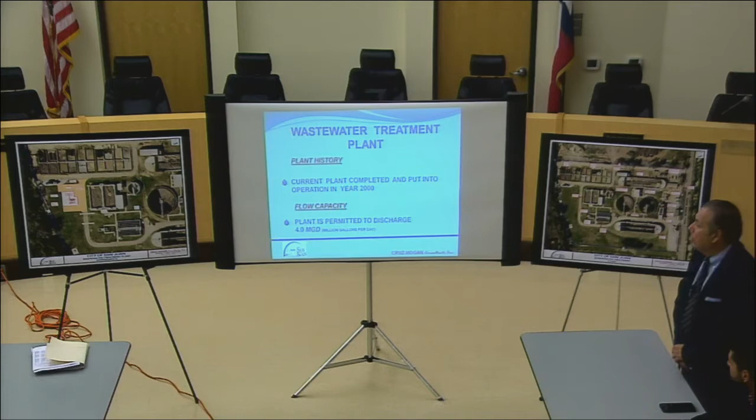The current plant was completed and put into operation in the year 2000. The plant is permitted to discharge 4 million gallons per day. Current discharge flow is averaging about 2.5 MGD per day, or approximately 60% of its permitted flow.

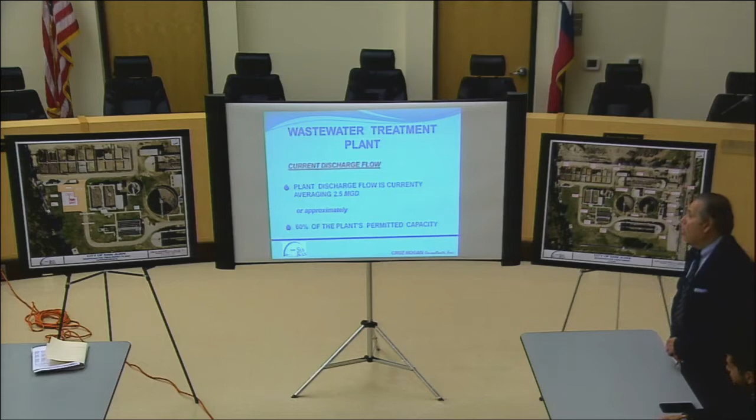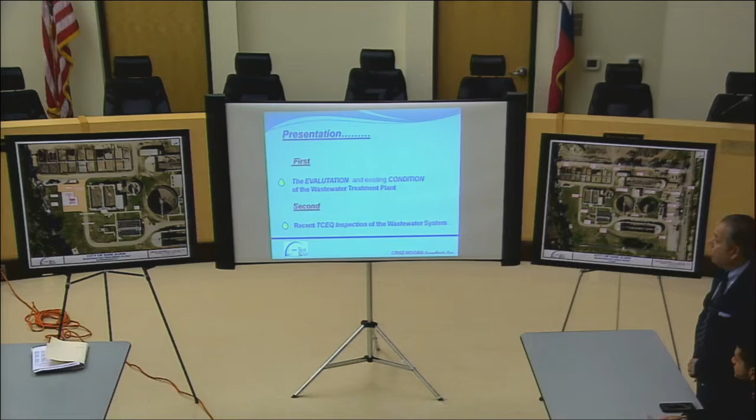Our presentation is going to be in two segments. The first part will look at the evaluation and existing condition of our wastewater treatment plant. The second portion will look at the recent TCEQ inspection of the wastewater system.

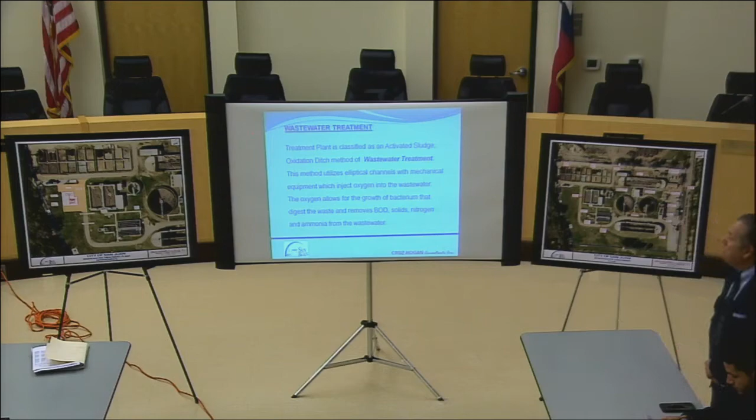This is Wastewater Treatment 101. In a very brief way, I'm going to tell you what a wastewater treatment plant does. The treatment plant is classified as an activated sludge oxidation ditch method of wastewater treatment. This method utilizes elliptical channels with mechanical equipment which inject oxygen into the wastewater. The oxygen allows the growth of bacteria that digest the waste and remove BOD, solids, nitrogen, and ammonia from the wastewater.

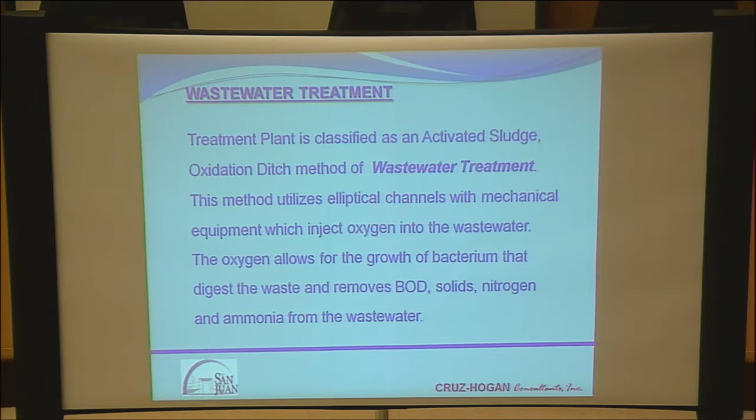Wastewater is sent to the clarifiers. In the clarifier, sludge settles and clarified water flows over the weirs, then into the chlorination and de-chlorination chambers for disinfection. The fully treated wastewater discharges into the adjacent drainage ditch.

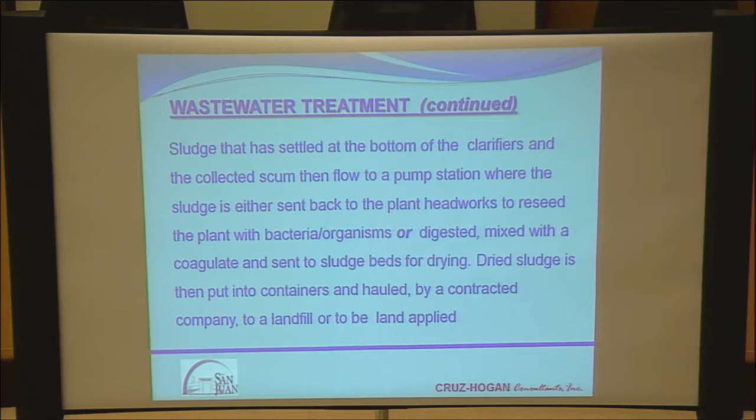Sludge that has settled at the bottom of the clarifiers, along with collected scum, flows to a pump station where the sludge is either sent back to the plant headworks to reseed the plant with bacteria and organisms, or digested, mixed with a coagulant, and sent to the sludge beds for drying. Dry sludge is then put into containers and hauled away by a contractor company to a landfill or to be land applied.

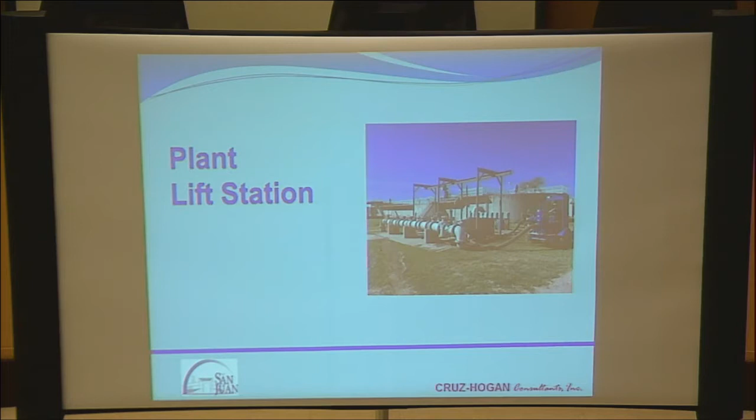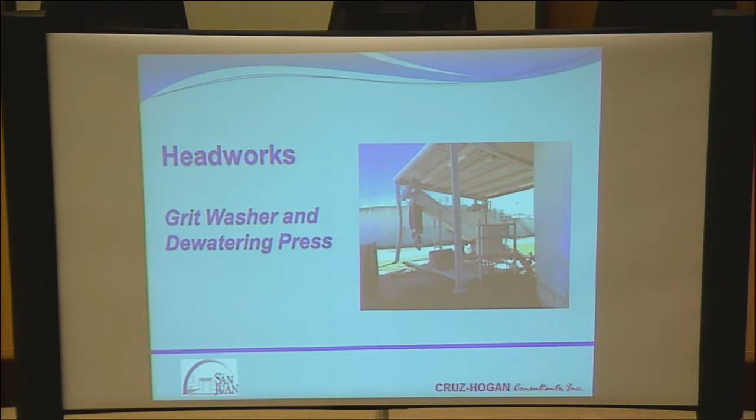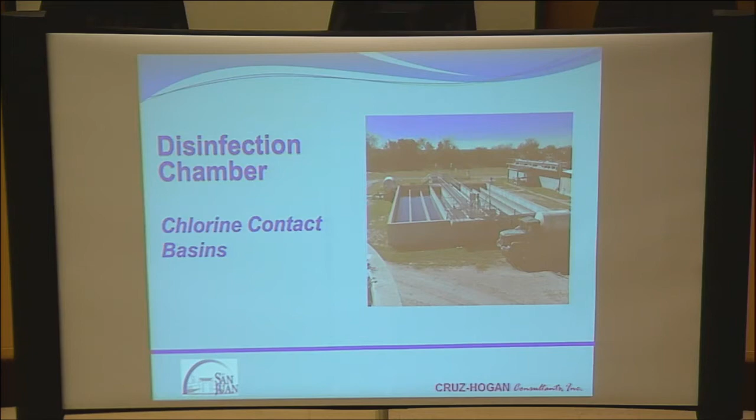This is the disinfection chamber, which has the chlorine contact for the disinfectant water. The chemical building houses the chlorination and de-chlorination systems.

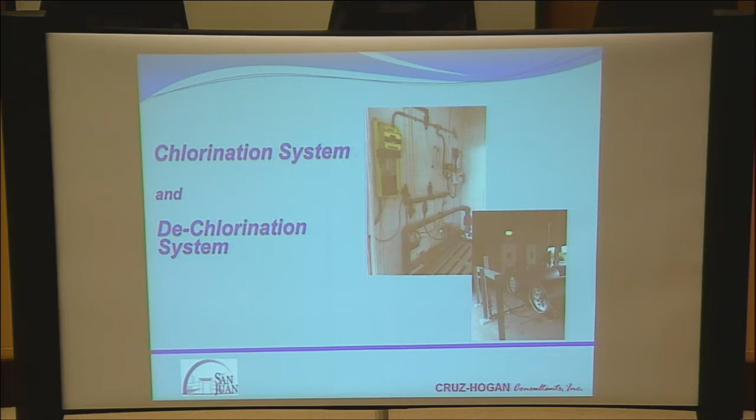In the chlorination and de-chlorination systems, you see some of our chemical injections. These are our chlorine tanks down here. This is the discharge metering of our wastewater, which goes through what we call the Parshall flume, the meter device.

Sir, I got a quick question. In reference to the chlorine tanks, is it safe, because I remember seeing them on the floor? Is that safe? It's pretty typical.

Normally they're on the floor, on scales, and that's where they feed the chlorine injection. It's fairly typical on this type of plant. It's just on the floor.

Some of the newer construction is starting to put them on top of concrete pillars, and the reason is it makes it harder for somebody to drive a vehicle into the tank. They're above the front end of a bumper vehicle, so it's a big concrete structure.

But one of the things a lot of smaller plants are going to is to get away from chlorine gas completely and go to ultraviolet disinfection. It makes it a whole lot safer, not only for the operators and the environment, but for the public in case there was an accident that released gases. The chlorine is very caustic, and a chlorine leak can actually hurt a lot of people.

Next slide. This shows how our wastewater comes into the plant and how it's discharged. You see the difference of what the treatment does for our wastewater.

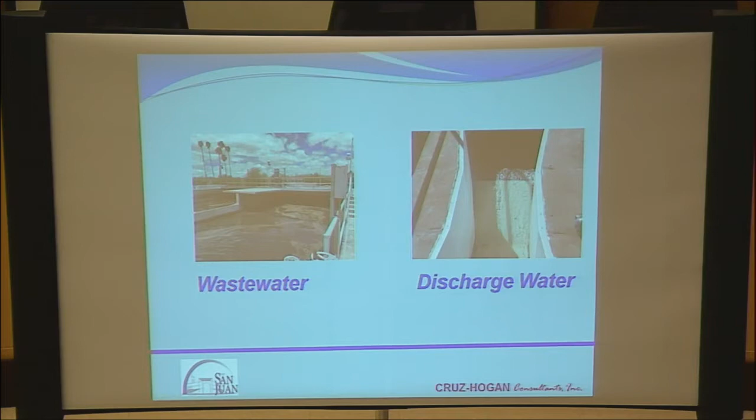As part of the wastewater process, we have what we call the biosolids train, where we take in the sludge, through the return and waste activated sludge pump station.

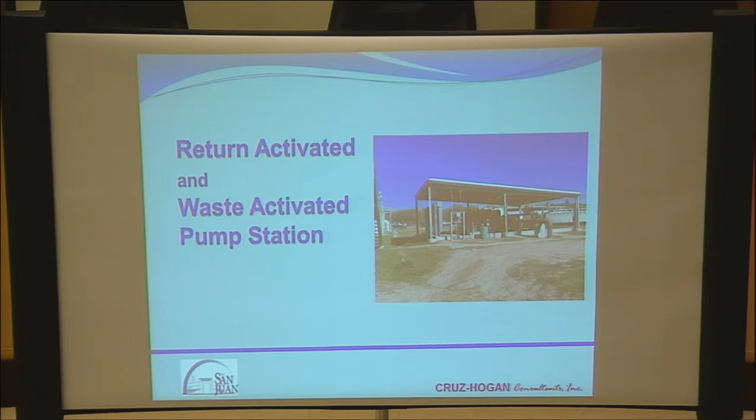This is the sludge gravity thickener. We estimate that the sludge comes into the thickener at 0.8% solids concentration and leaves at about 3%.

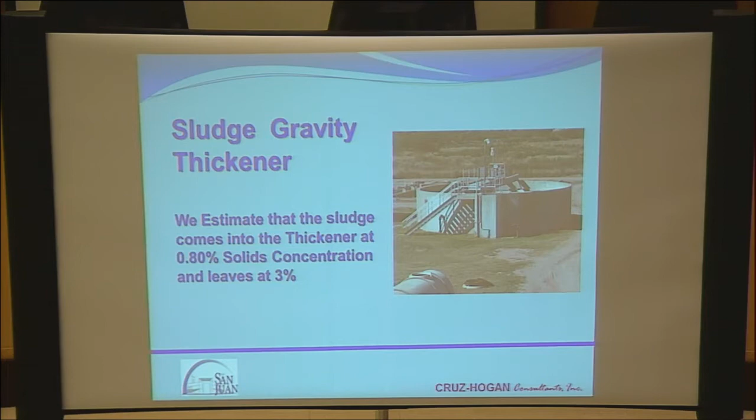The sludge digester reduces the biomass volume of the sludge approximately 40 to 50%. It reduces the amount of sludge that will ultimately need to be hauled away.

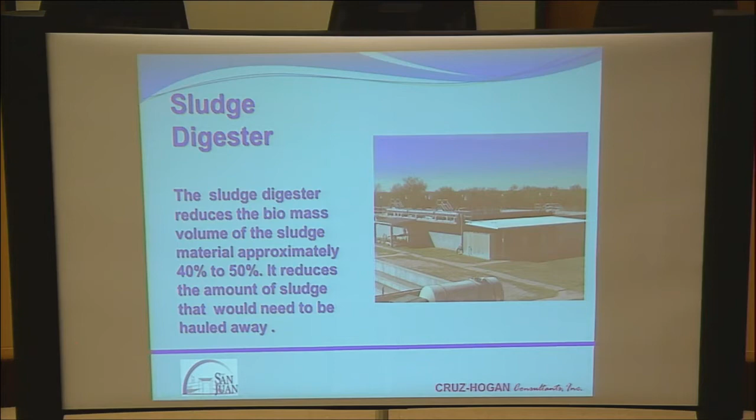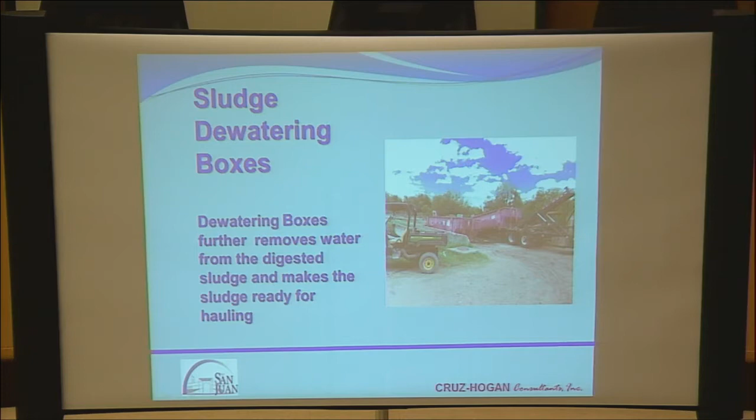Over the past few months, a preliminary evaluation of the city's wastewater plant was performed to assist the city in assessing the current conditions and needs of the wastewater treatment plant, and to assist in planning any necessary plant improvements. In the preliminary evaluation, we analyzed the conditions of all the existing facilities and equipment.

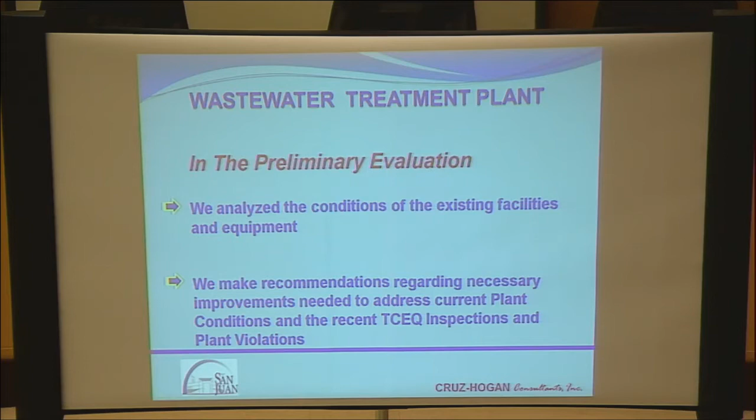We make recommendations regarding necessary improvements needed to address current plant conditions and the recent TCEQ inspections and plant violations.

The summary of the plant evaluation shows that many original plant components have been abandoned and are at a point where they need to be replaced. Many plant components have not been properly maintained over the years and need to be rehabilitated, repaired, or replaced. And some components have simply outlived their normal useful life and need replacement at this time.

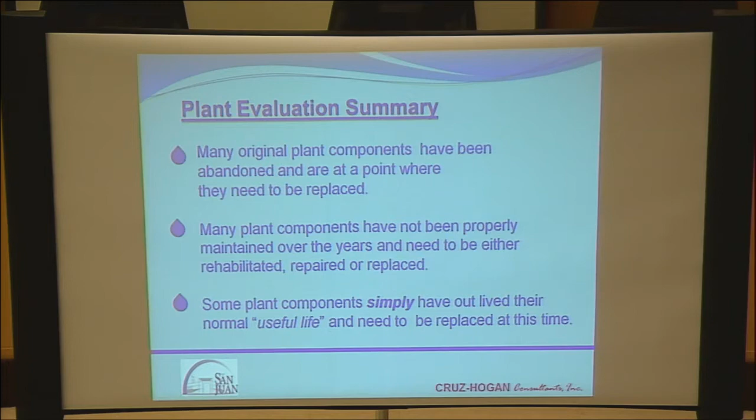Various plant components and equipment consume electrical power. Newer and more energy-efficient equipment should be considered.

Plant controls for efficient operations are limited or currently non-existent, so we recommend the installation of a SCADA system. It should be something considered in the upgrades of the plant.

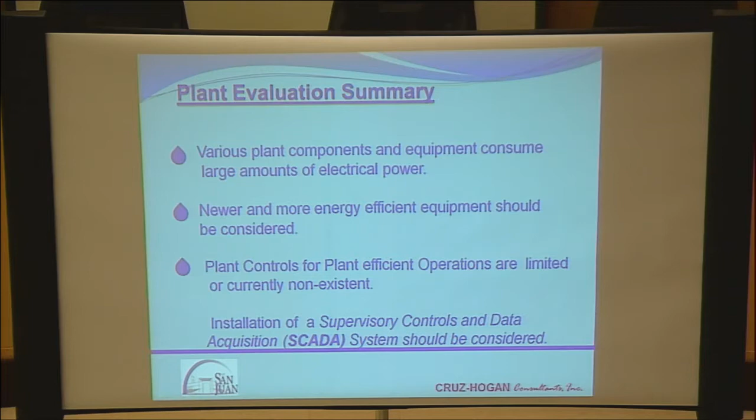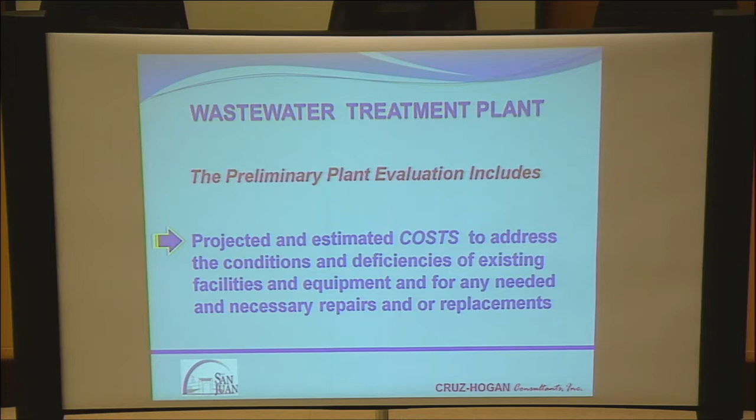The preliminary plant evaluation includes projected and estimated costs to address the conditions and deficiencies of existing facilities and equipment for any needed and necessary repairs and or replacements.

From the plant evaluation, a list of major deficiencies was developed. The first one is the plant lift station concrete well deterioration.

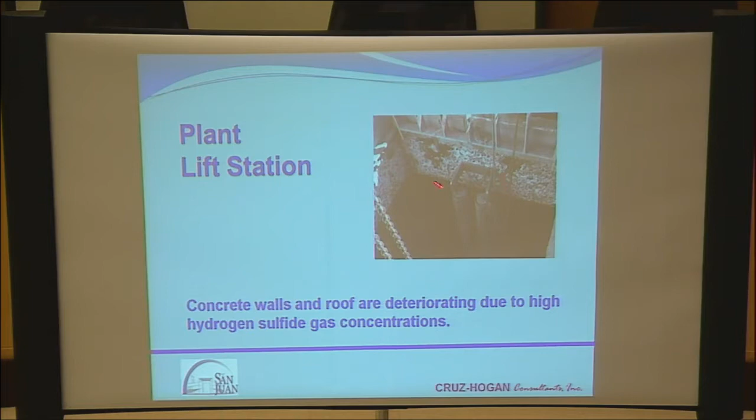If you remember, we saw the lift station—a lot of the concrete in the plant lift station has actually deteriorated. The H2S gas has corroded a lot of the concrete, since H2S gas creates sulfuric acid, so a lot of the concrete wall is being deteriorated. In a lot of places, the reinforcing steel is already exposed.

The second deficiency is the headworks mechanical screen, which was not operational. You remember, this was the thing up in the air that hasn't operated in years.

Right now, all the wastewater is being taken in through the bypass channel, and the screen is being cleaned manually. This poor gentleman actually, on a daily basis, goes out and physically has to clean the screen with a rake.

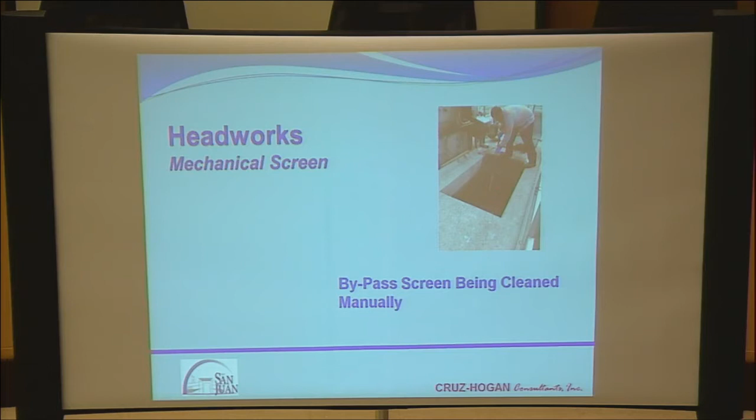The third deficiency that we noted is the headworks of the grit chamber not operational. If you remember, the headworks has a lot of growth, a lot of solids inside the chamber.

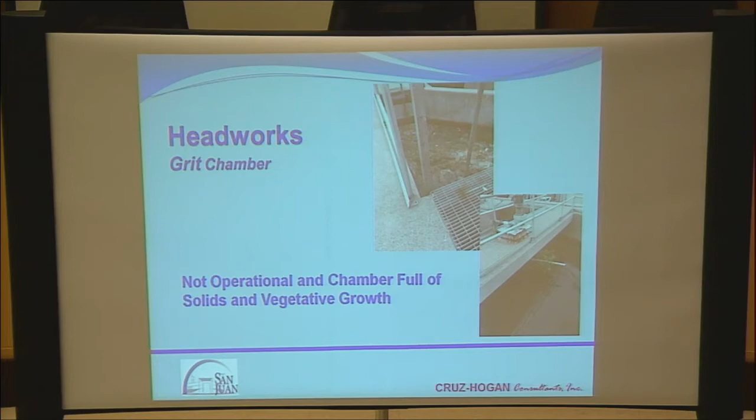The headworks of the grit washer, the dewatering screw press, is not operational. This is the one at ground level next to the headworks section. That hasn't been operational in years.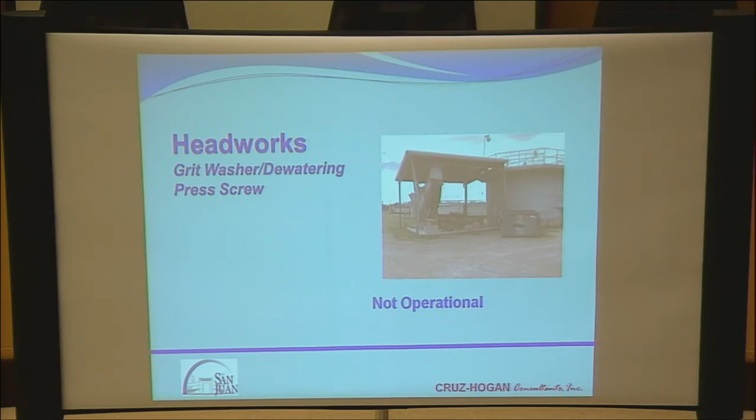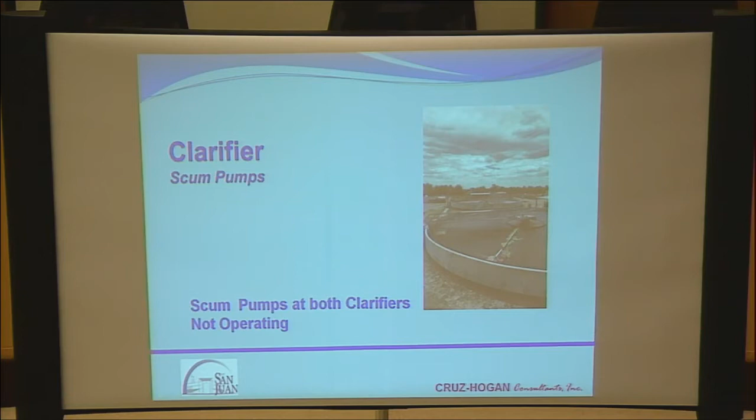The clarifier scum pump's not operational. Each clarifier has got a scum pump where all the scum on top actually gets pumped away. Those pumps are not operating at this time.

The gravity sludge thickener not operational. You remember this one was the one that had a little bit of vegetation inside, and hasn't operated in years.

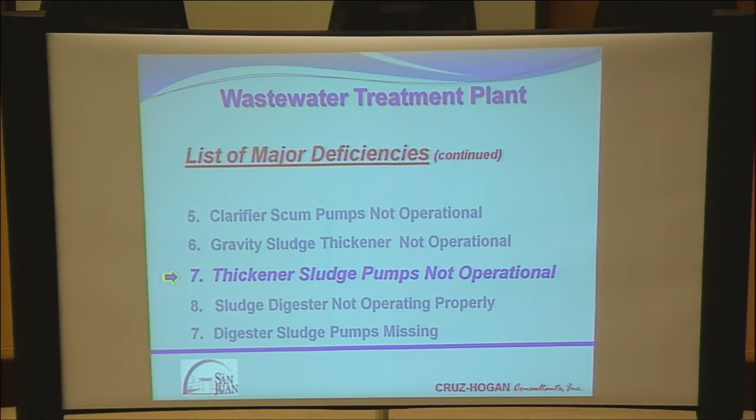The thickener pumps, the thickener sludge pump, is not operational. These are the pumps that actually pump the thickened sludge. They're not operational and highly deteriorated.

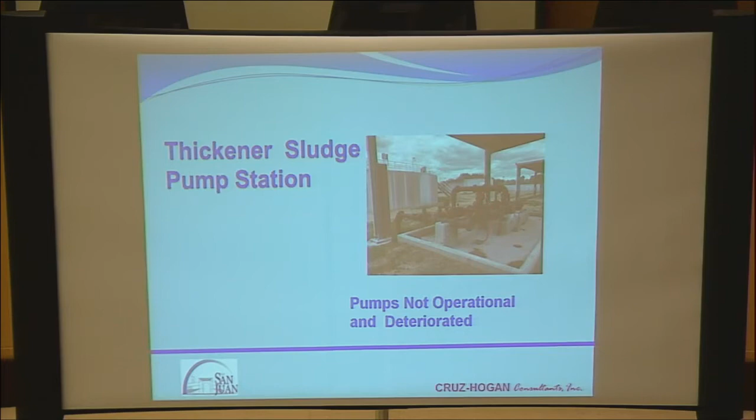The sludge digester is not operating properly. Remember, this was a sludge digester. The reason they're not operating properly, if we go to the next slide, is that digester sludge pumps are missing. These are the pumps next to the digester. They've been missing for some time, and I don't know where they are, but the whole station is highly corroded and deteriorated.

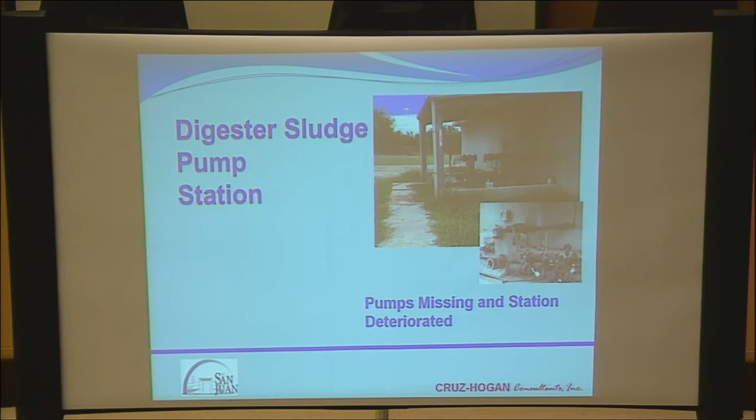The plant water pump station system is leaking. A lot of these pumps are worn, and actually they're leaking a lot of water. The pressure tank up here on top has got problems. The compressor, even though it's working, is kind of worn and deteriorated.

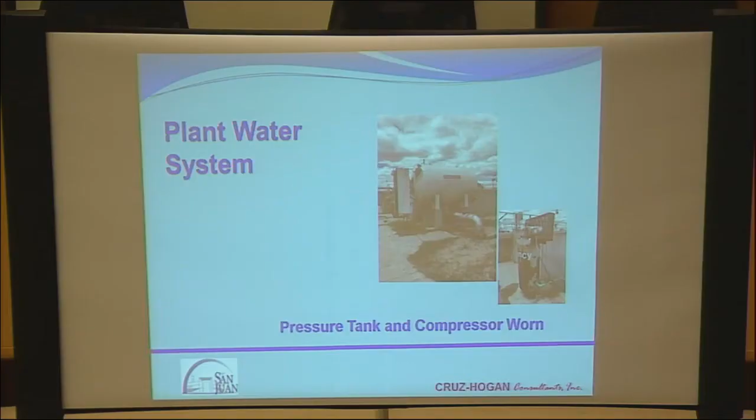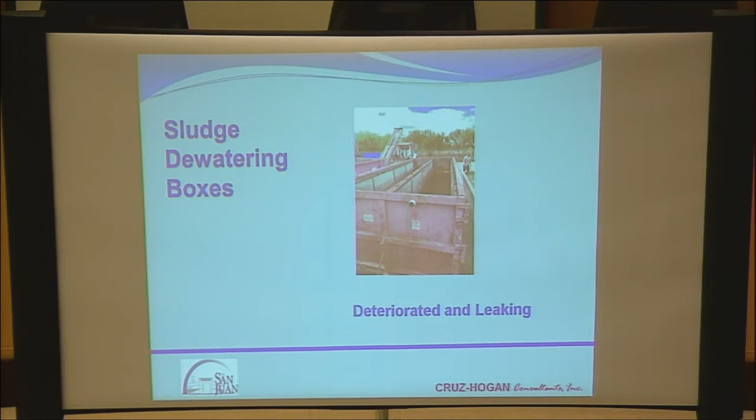The dewatering boxes are deteriorated and leaking. These are big red boxes out there that look like dumpsters. Actually, these are being replaced as we speak by the city public utilities, but they are highly deteriorated.

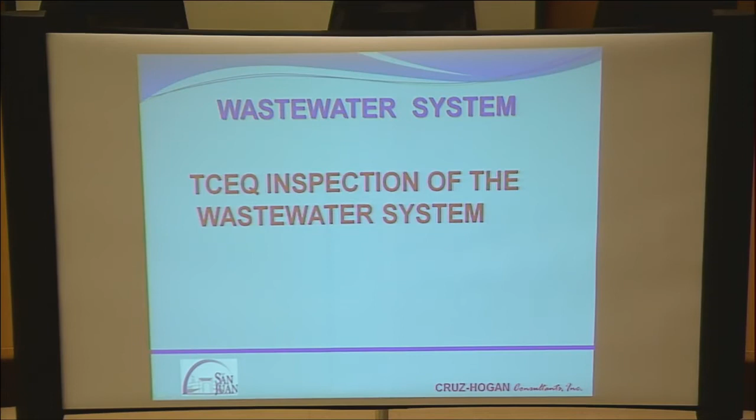Now we're going to talk about the TCEQ inspection of the wastewater system. On November 14, 2017, TCEQ conducted an inspection and evaluation of the city's wastewater system and treatment plant facility for compliance to TCEQ requirements. On November 30th, TCEQ issued a letter titled Notice of Violation for the Comprehensive Compliance Investigation for the city wastewater system.

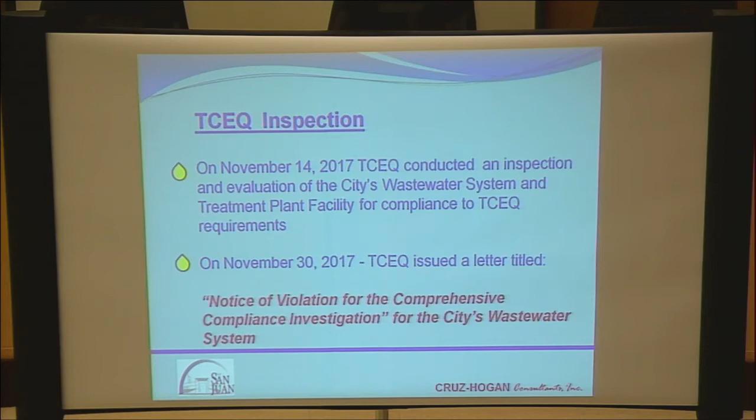On November 30th, TCEQ listed 11 alleged violations. 7 of the violations were for compliance issues at the wastewater treatment plant, and 4 of the violations were for compliance issues at 3 separate lift stations.

The violations of the wastewater treatment plant: the first one was failure to maintain the mechanical bar screen, and we've seen that bar screen is not operational. The second one was failure to operate and maintain the grit chamber. We've seen the grit chamber, of course, that was not operational also.

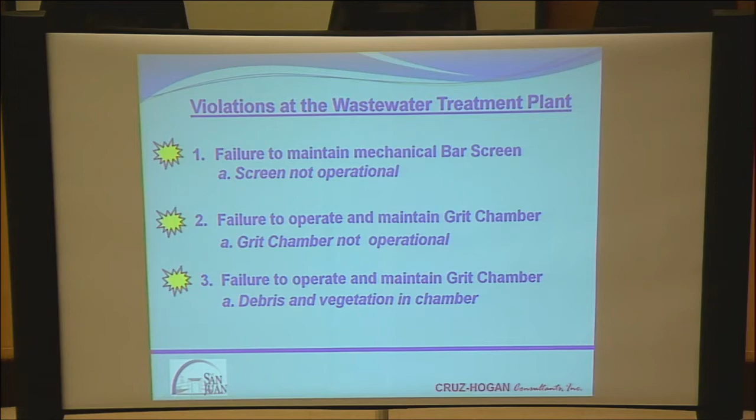Failure to operate and maintain the grit chamber - in this case, there was a lot of debris and vegetation in it, and of course we saw that too. Failure to operate and maintain clarifiers - there's excess solids inside the clarifiers.

Failure to operate and maintain the gravity thickener - if you remember, that thing was not operational. Failure to provide required plant protection - actually, there were some missing sections of plant perimeter fencing. That has already been done by your public works, your public utilities.

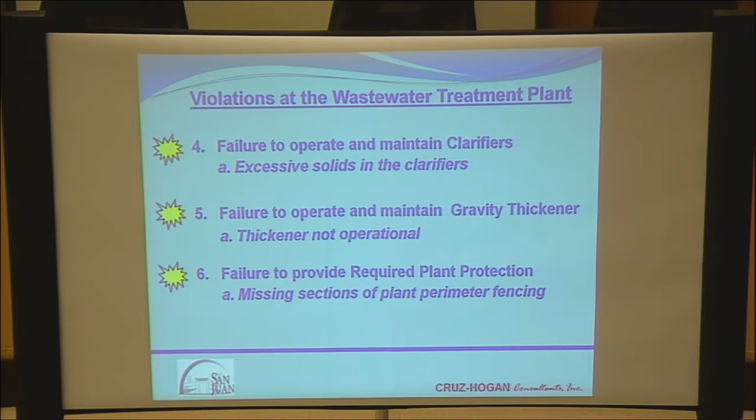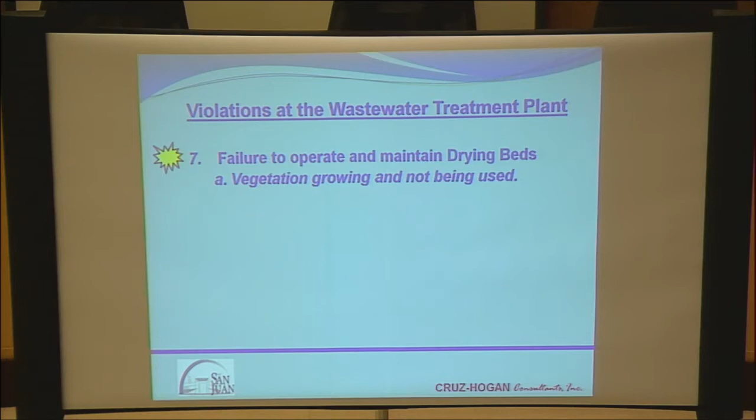Failure to operate and maintain drying beds. Those drying beds have basically been abandoned. They've got vegetation growing and are basically not being used. Now, the violations of the wastewater collection system.

A lot of these, David, are already addressed, but we're going to go through them anyway. Failure to operate and maintain lift station number 2 - excessive grease in the wet well. Failure to secure lift station number 2 - the west side of the lift station fencing was not fully secure.

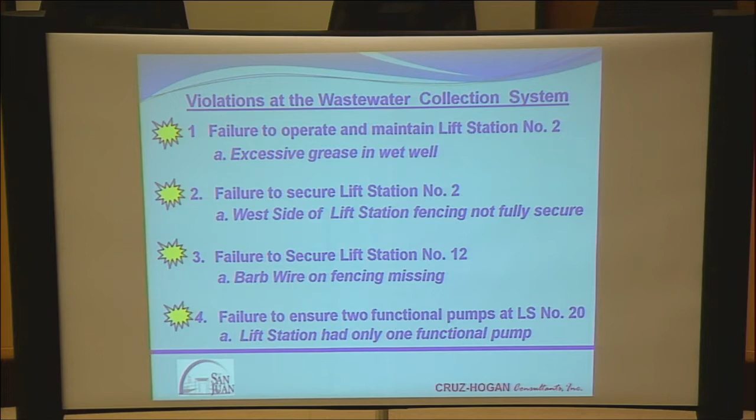Failure to secure lift station number 12 - barbed wire missing on the fence. Failure to ensure 2 functional pumps at lift station number 20 - lift station 20 only had 1 functional pump at the time.

The November 30th TCEQ letter requires the city first to prepare and submit to TCEQ a written description of corrective actions taken for compliance by December 29, 2017. But of course, the city received that letter mid-December, and the city has actually asked for an extension to reply to that. Also, we need to prepare and submit to TCEQ a correction plan to be taken by the city to resolve the non-compliance issues.

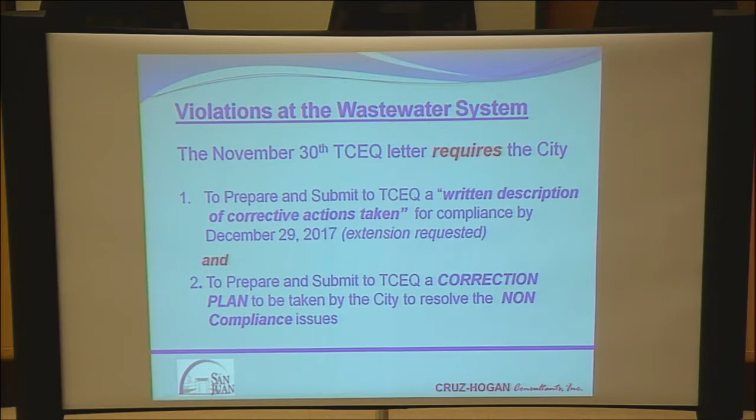And actually, we are currently preparing that now - the projected and estimated cost for necessary improvements.

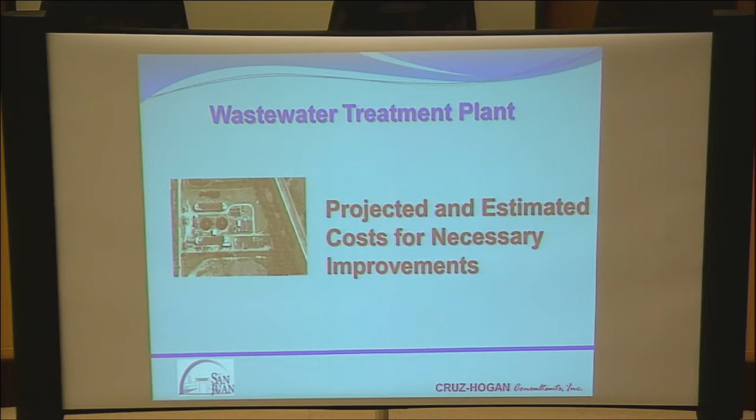We kind of broke this down into 3 sections. The first section is improvements needed to resolve the TCEQ plant violations. The next one's improvements needed to repair and rehabilitate existing plant facilities. And number 3 is improvements desired and recommended to upgrade the existing wastewater treatment plant facilities.

And we have a plant that's almost 20 years old. And these are the costs that we can show you. We have extensive cost estimates, but we just kind of gave you the bottom numbers here.

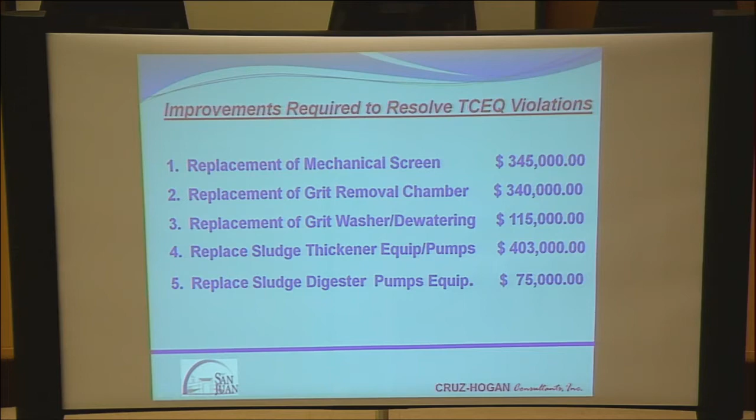Replacement of the mechanical screen, $345,000. Replacement of the grit removal chamber, $340,000. Replacement of the grit washer and dewatering, $115,000. Replace sludge thickener pumps and equipment, $403,000. Replace sludge digester pumps equipment, $75,000.

Replace Clarifier Scum pumps, $150,000, for a total of $1,428,000. Of course, these are only construction costs. They do not include any design, financing, legal fees, or cost of issuance costs.

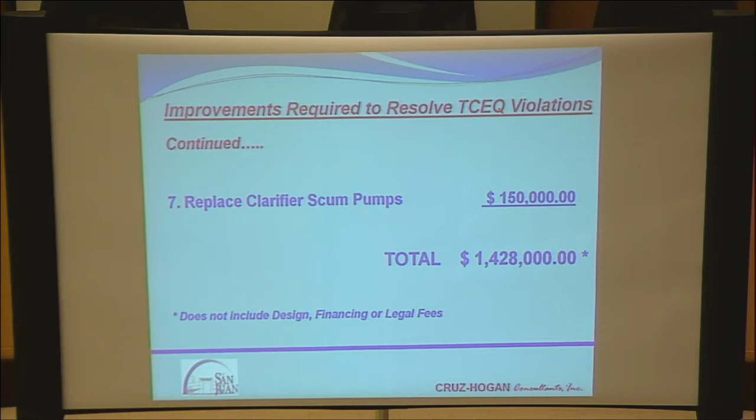The second one, it was - go back, Mark. These were the items that need to be addressed to resolve the TCEQ violations. Rehabilitation and repair items: rehabilitate plant lift station, $560,000. Replace plant water system equipment, $138,000, for a cost of $698,000.

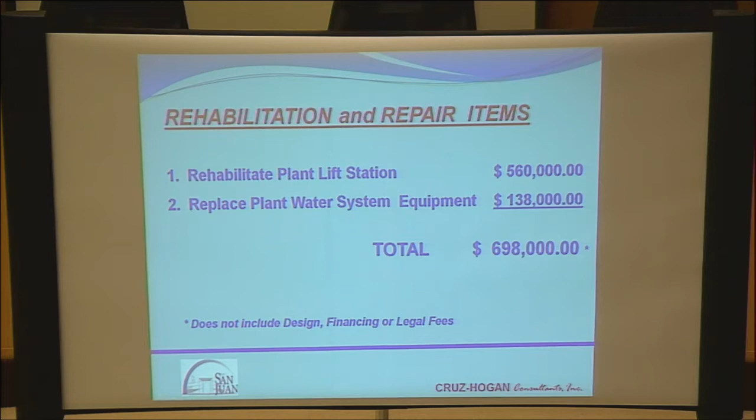Next slide. Plant upgrade items. These are basically to upgrade your plant. You know, we're living 20 years down the road, and plants need to be upgraded periodically.

Install VFDs on aeration basin motors. On the next part of the slide, we're going to have costs on the aeration motors as far as energy savings. So to upgrade that plant for energy service, we will install VFDs for $368,000 on the aeration basin motors.

Upgrade plant disinfection system to UV. This is something that Mr. Salinas talked about earlier, about getting rid of the chlorine and going to ultraviolet light for disinfection. Not only will you do away with the chlorine gas, you get rid of the de-chlorination system at the same time.

Install weir washers at the clarifiers. You remember, I think one of the groups we took out there last week, the guys were actually physically cleaning all the weirs on the clarifiers. There's a lot of algae growth that goes over. Nowadays, the new clarifiers are being designed - they actually put washers that kind of clean this thing and eliminate somebody having to go out and physically clean them. That cost was $150,000.

Install SCADA plant controls. This plant has no controls on it. Back in 2000, there were very few plants that actually had controls. What controls do is allow the operators to actually have a computer screen, and they could monitor their plant, control their plant, and allow the plant to go into automation many times. That way the fella can go out there and actually do plant maintenance and other things in the plant. That's a big cost of $1.2 million.

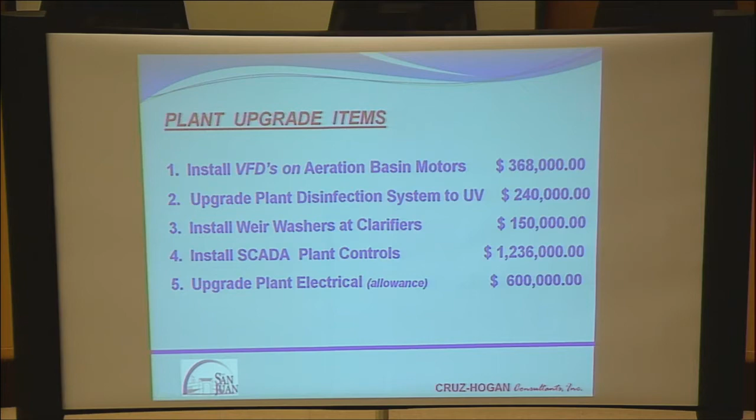Rehabilitate existing paving. A lot of that paving out there is actually gone, a lot of the asphalt paving. Cost of $200,000. A new plant administration lab building, $427,000. I think we saw that plan.

They're fairly small. I think Mr. Salinas was looking at upgrading his lab out there. He certainly needs the room. The workers need a change - they need lockers, they need showers, they need a lot of things. And really, on newer plants, you're starting to see a bigger administrative space for the people to actually eat their lunch, take their showers, and that type of thing.

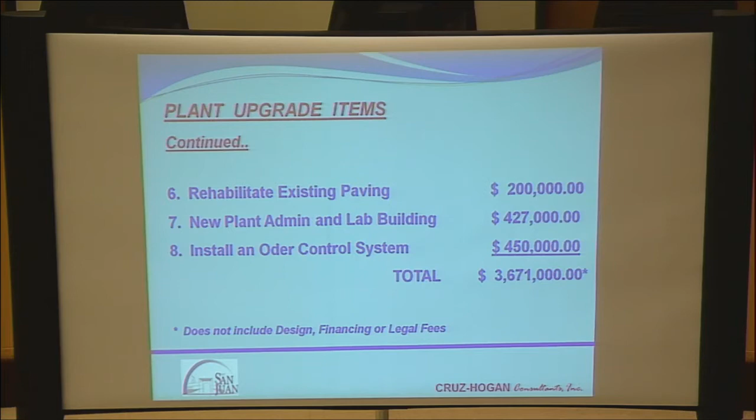We threw this in just to have some options, you know. Question is, if the city moves forward to make these upgrades, how will we fund these? Number one, certainly you can fund it through your water and wastewater general fund. You can fund it through general obligation revenue bonds. You can fund it, if there's still funding, through loan money at the North American Development Bank.

Historically, you've been funding your water and wastewater through the Texas Water Development Board, either through the Clean Water SRF funds, or they also have the development funds at the Water Development Board. The first step, if you move forward with Water Development Board funding, is to prepare the project information form, which we call the PIF, for any selected wastewater treatment plant improvement project, for submission and inclusion into the Texas Water Development Board 2019 Clean Water State Revolving Fund Intended Use Plan.

All projects that are funded through the SRF funds at the Water Development Board must be put into the IUP. The IUP is a clearinghouse; when projects are put in the IUP, they have to be actually approved by Region M. And as you put your projects on the IUP, they're actually graded. The Texas Water Development Board, even TCEQ, will look at all the projects that are put in the IUPs by all municipalities around the state of Texas, and they will rank your project.

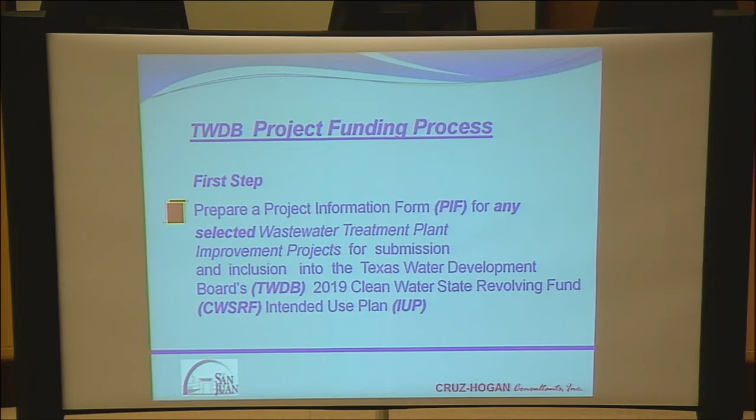Number one project rating is very good. Rank 99 is terrible. So the projects that actually rate low do well in funding. Mr. Cruz, I have a question. So if you have more violations, you rank up there on top, right? Right. Yes. Actually, being bad is good in this case.

Unfortunately, the way the system works, if you have problems at your plants, they do better as far as the ranking. You're not rewarded for doing a good job, put it this way. Plants that have problems or are out of compliance, have violations, when TCEQ is looking at ranking projects, your project will rank a little higher. Violations help you rank higher, but there's other components that help you rank higher, and that is having what they call a green project.

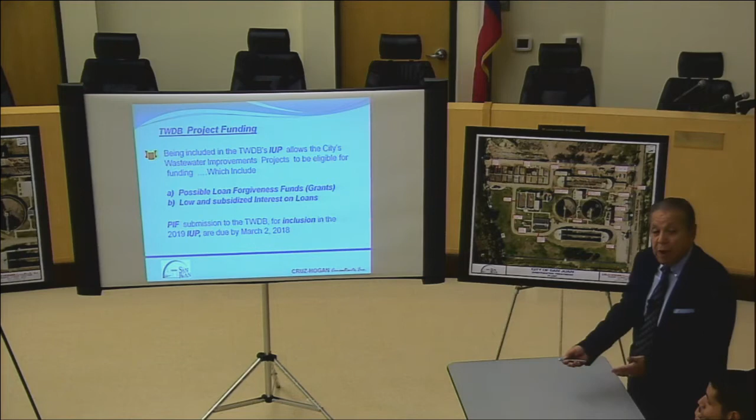A green project is a project that would save power, would save water consumption. In this case, we're doing a wastewater treatment plant, and we'll touch a little bit on energy savings. If you have a project that you put into the IUP that's a green component project, you get better rankings when they're looking at loan forgiveness or low interest loans. Did I answer your question? I got it.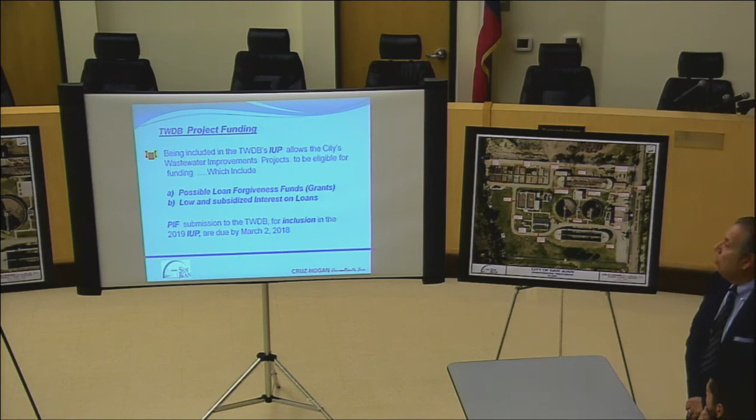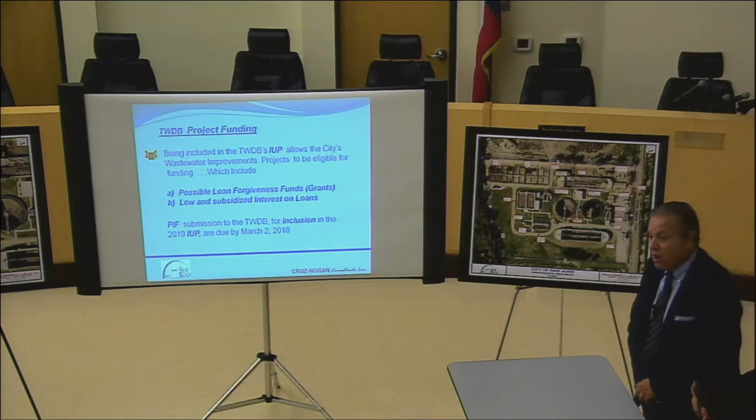In the Texas Water Development Board project funding, being included in the Texas Water Development Board's IUP allows the city's wastewater improvement project to be eligible for funding, which includes possible loan forgiveness, which the Water Development Board calls grants, and low and subsidized interest on loans. These projects are the state revolving projects, so they have subsidized interest by the federal government. The PIF submissions to the Texas Water Development Board for inclusion in 2019 are due by March 2nd of 2018.

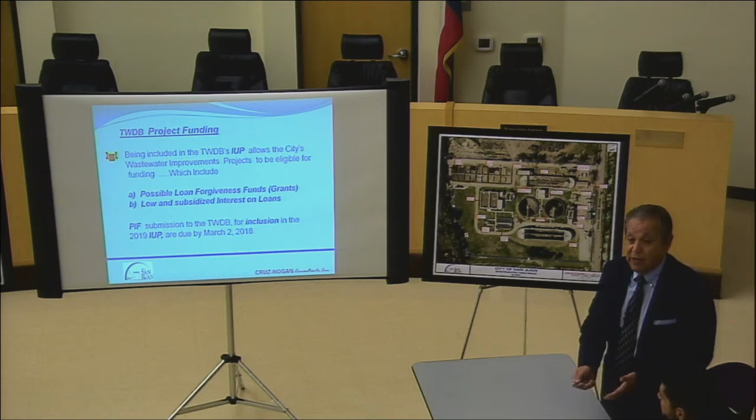Our recommendation is if the city wants to look at funding, possible grant funding, low interest funding, it's always good to put your projects in the IUP. It doesn't commit you to anything. But if your project ranks well, you may be eligible for 30% loan forgiveness. Very similar to your water treatment plant. That water treatment plant cost roughly $8 million. You got a little over $3 million in loan forgiveness money on that particular project.

So there is money at the Water Development Board, and it's all dependent on the rankings, who submits projects, how your project ranks with the TCEQ, that type of thing. We never know. Usually the process, if you go through the IUP, you put your projects in early March, and probably late summer the Water Development Board comes out with their rankings. And if you move forward to funding, your project applications will probably be due toward the end of the year.

That's the end of this project, but we have another quick presentation on energy savings. David wanted us to look at energy savings at the wastewater treatment plant, because if we think about moving through the PIF at the Texas Water Development Board, we can look at this and hopefully rank our projects a little higher. This presentation is called Aeration Equipment, Electrical Consumption and Savings.

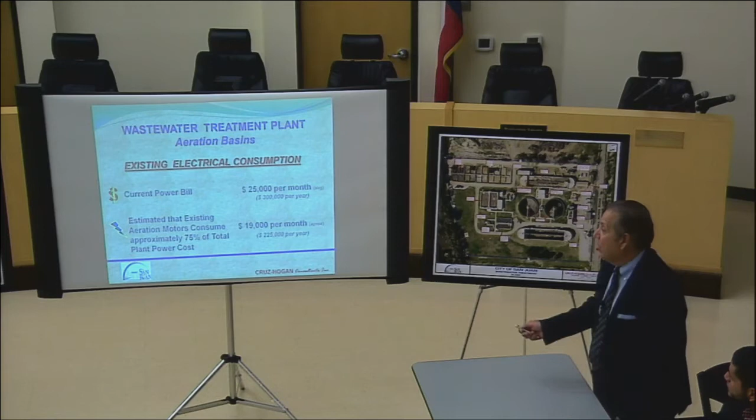Your current power bill at the wastewater treatment plant is about $300,000 a year. That's a big number. It's about $25,000 a month. And your aeration motors at that plant consume about 75% of the total power cost. So it's about $19,000 a month or $225,000 a year that your 4 aeration motors at your aeration basins are consuming. So that's a big cost. And these are the 2 aeration basins, the one up here and the one down here. There's 2 of them.

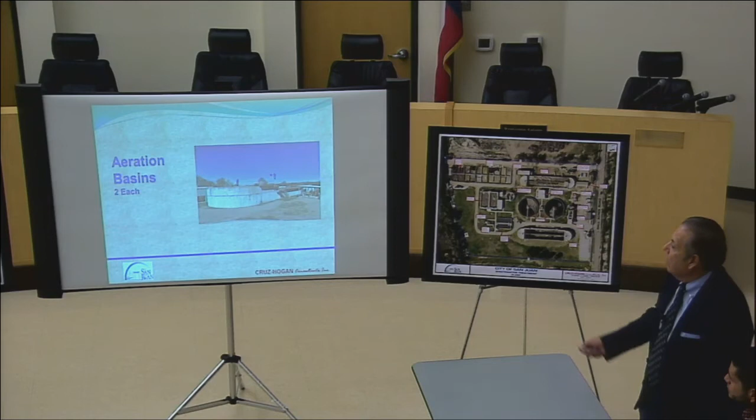Each aeration basin has got 2 big motors with big impellers. They're beating the water, one on each side. And I got one of our engineers to stand next to the motor to show you how big that motor is. It's a very large motor. It's a 125 horsepower motor.

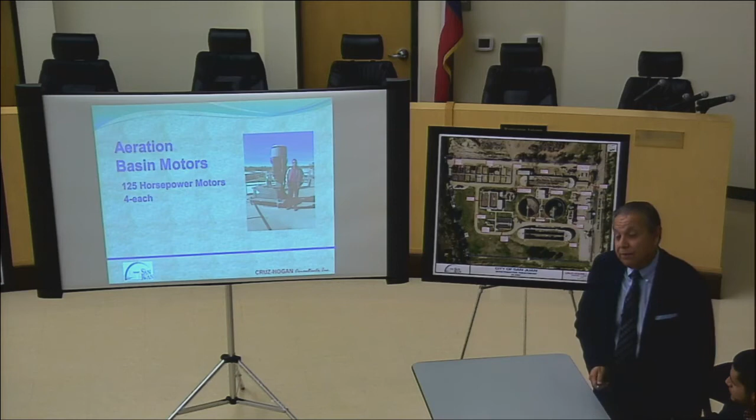There's 4 of those. Some of the options we looked at, alternatives to possibly saving money on power costs at the plant: changing out the existing basin aeration motors to variable frequency drives. Right now, basically your motor's got high and low speed. What a variable frequency drive does, depending on the oxygen of the water, it'll either speed up the motor, or if you don't need that much mixing, it'll slow down the motor.

And it's been shown that you could save about 25% of your total power over the existing mechanical aeration. Another option is to convert the existing aeration basin from mechanical aeration to diffused aeration. It's been noted that we can save approximately 50% of the power costs over mechanical aeration.

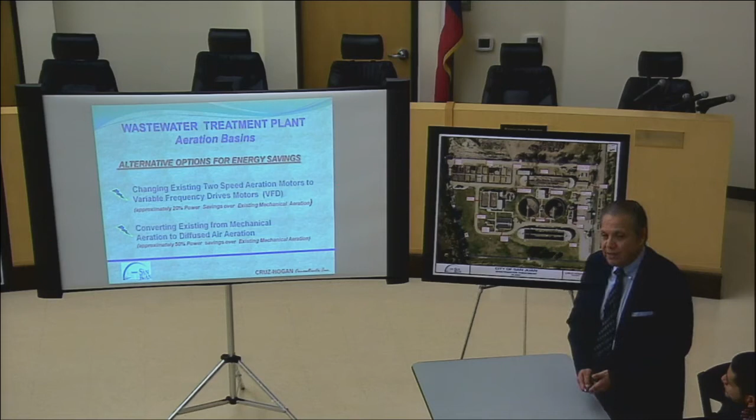These are the savings. If we were to convert the existing motors with VFDs, we could save roughly $3,800 a month or about $45,000 a year on power costs. If we were to convert the aeration basins to diffused air aeration, we could save approximately $9,500 a month or about $114,000 a year on power.

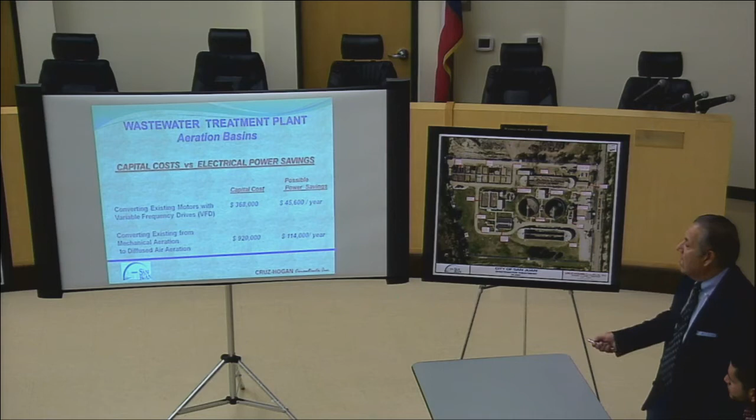The capital cost versus the electrical power cost. You see that the capital cost of converting to VFDs is $368,000. You have a savings of about $45,600. Converting the aeration basin to diffused air, you have a capital cost of about $920,000, with a power savings of about $114,000 a year.

Take it one more step further versus the payback. If you have those same VFD motors with a capital cost of $368,000 and a power savings of $45,000, the payback is 8 years. Same thing with the diffused air with a capital cost of $920,000. Your power savings is about $114,000, so the payback on that one's also about 8 years.

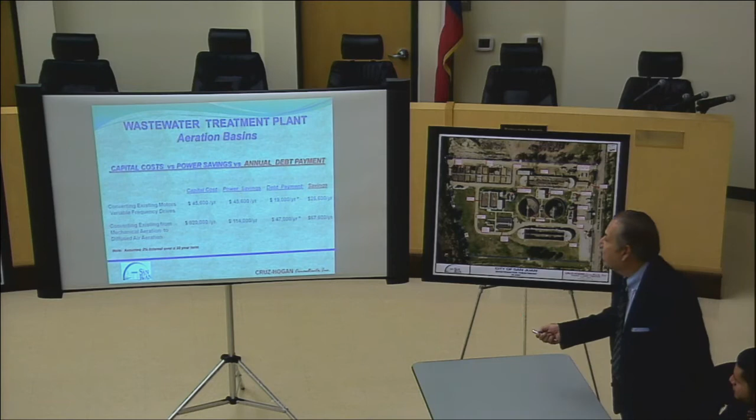To take it one step further, we see how much that savings can buy you in debt. So we got the capital cost versus the power cost versus the annual debt payment. On the first one, the VFD motors, your capital cost was $45,000. That number's wrong. What was that number? $368,000. Sorry for that. Power savings of $45,600.

If we went out and made a loan for that $368,000, the debt payment per year would be about $19,000 a year. That assumes 3% interest over 30 years, but your savings is still $26,600.

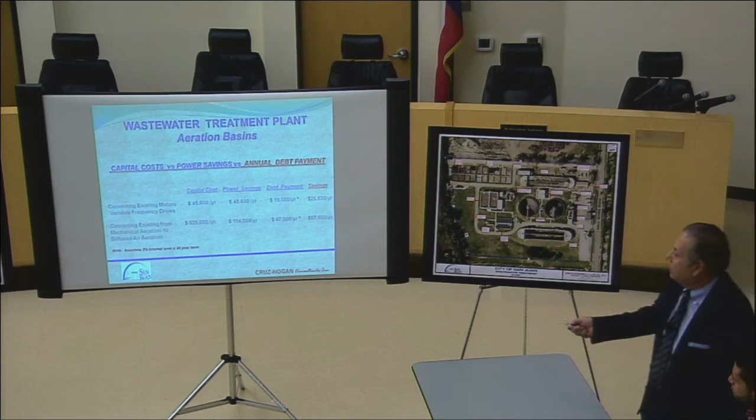On your mechanical aeration to diffused air, you had a capital cost of $920,000, power savings of $114,000. With a debt payment on that loan, if you were to go out and get a loan on $920,000, the savings would be $67,000 a year. So you see where you have money to pay for those improvements over time, and you will still have money left over to use for other purposes on your plant.

So that's why we're looking at possibly changing out the aeration motors in your aeration basin. The only thing is that you still have this capital cost up front. But if you can realize that in your debt payment, basically, it's a pretty good deal.

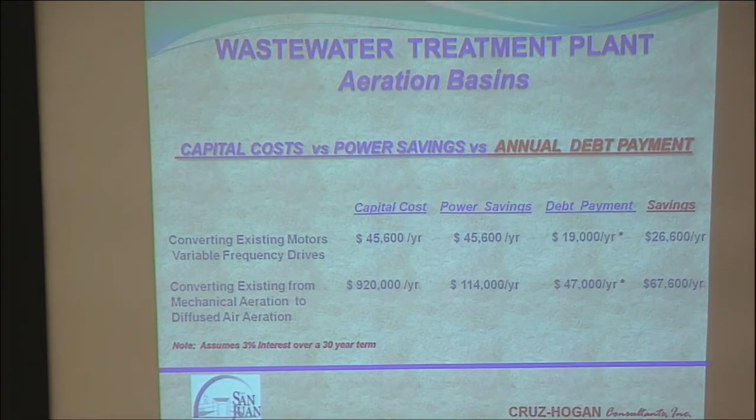The lifespan of those motors? How long do those motors last? I think one motor's been replaced in the last 20 years. Yeah. Several of the motors have been rehabbed over the years. Unfortunately, like I was telling you during the walkthrough, there weren't a lot of records being kept back then when stuff was replaced. But on average, these new motors, how long will they last?

On average, as long as you provide the maintenance, anywhere from 7 to 10 years. That's the lifespan for a motor. Can they last longer? Yes. But after that 7 to 10 years, they're not as efficient as they were. So they recommend that you look into a depreciation funding system to replace those at that life cycle, so that you continue to get the savings that you're projected. Because if not, they're not as efficient anymore, and they start using more electricity as they go along.

Yeah, because you're spending 8 years to get a payback on them, and they only last 8 years, so it means you gotta get ready to buy a new motor at 8 years. 7 to 10 years. Yeah. But that would be on any motor, you know. Yeah.

But it's different with a VFD on those motors, though. Now the motor's being used less than if it's just going on or off, so the wear and tear on that motor is going to be a little bit different. It might extend a little bit more than just the 7 to 10 years. They don't have a cutoff. It might be a little bit more than that, because they just speed up and slow down, speed up and slow down.

What kills the motor is starting and stopping. So the VFD slowly allows it to ramp up and ramp down, depending on how much it needs to be used. The other motors, since they're a different type of drive than the top ones, take a lot of beating because they're actually physically beating the water. So every time they come on and off, there's a torque assigned to it.